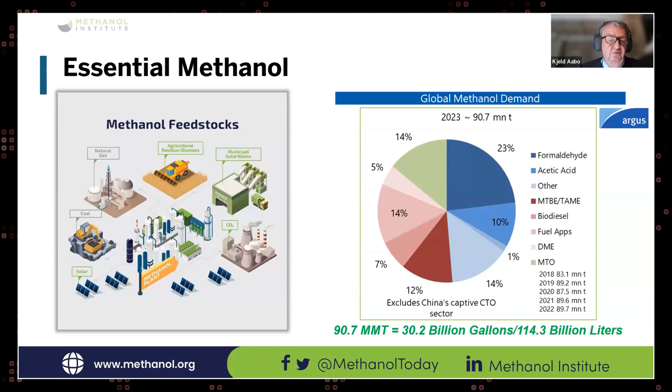Suddenly the interest for the maritime was exploding, you could say, and a lot of members there are from that area, the maritime. Then we have renewables.

I was just two weeks, one month ago at Kasø in Denmark, where an e-methanol plant was introduced. It's a small plant, you could say, but quite big worldwide when we talk about startups and pilot projects - cubic meters, tons per year they are producing. They have gone together with Maersk Mc-Kinney Møller, with Lego, and also with medical industry in Denmark, Novo Nordisk, as they will take off the produced e-methanol, where they are actually collecting the CO2 from the biofuel production. So quite an interesting project coming up now, and they are actually extending it.

So things are really happening. That will also be shown later on in my presentation. Then there are the companies going for renewables, as we talked about here, and we have the technology providers also.

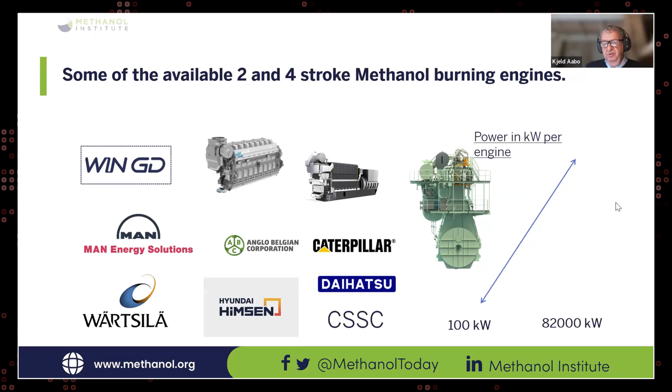If you look into the market and the OEMs, their intention for the design of future engines, you will see that already a lot of OEMs have engines burning methanol in their portfolio. It goes from 100 kilowatt up to 82 megawatt on one engine. So it's both propulsion engines, it's also gensets, and it's all what you use of engines aboard vessels. So there's no challenges there when it comes to the engine and choice of engine for methanol. Also, a lot of running hours have actually already been gone on two-stroke engines from 2016, where the first two-stroke engine was at sea trial.

The year before, actually, Wärtsilä had a four-stroke engine on Stena starting up on sea trial. It was a retrofit project and so on. So the experience on using methanol is, you can say, a long list.

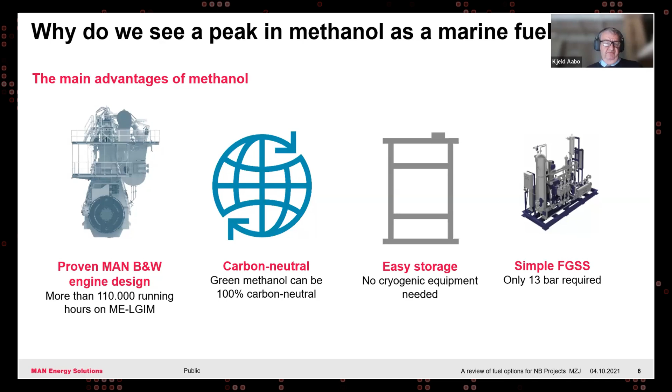It can be carbon neutral. It's easiest to storage - you don't have the cryogenic systems. It's a simple fuel gas supply system. And from my time in MAN, we went through a lot of hazard investigations along with the design and development of the engine itself, just to be totally safe. It is a low flashpoint fuel and has to be treated like it.

We are following closely what is happening on the engine side. This is new vessels and orders with methanol engines, propulsion engines. About 378 vessels have been ordered yet, and it's increasing every month. If you look at the top in the middle here, you will see the engine models - different bore sizes, like 95 centimeter. You have the 50 bore, and you have also coming up some of the a little bit smaller ones.

If we look at the OEMs - it's MAN, it's WinGD, it's Wärtsilä, it's ABC. And if you look at the application and vessel types, you see it's all from container vessels to offshore. It's ferry in between, ro-ro, it's oil product tankers, and so forth. And a long list here on the right side of the companies who have actually ordered such vessels.

This is the ready new vessels and ready book - 753 is registered, and these are vessels that, from the beginning when ordered, have the opportunity to be retrofitted later on. It's exactly the same engine they have from the beginning - there's no prepare of the engine on the engine itself, but they prepare the vessel, like having space enough for fuel gas supply systems and tanks, and also reinforced places on the vessel, so it's not necessary to do that when it's going to be retrofitted. Of course that will take a long time while the engines are in operation, in service. So to reduce that time is important, but also the cost for it is important.

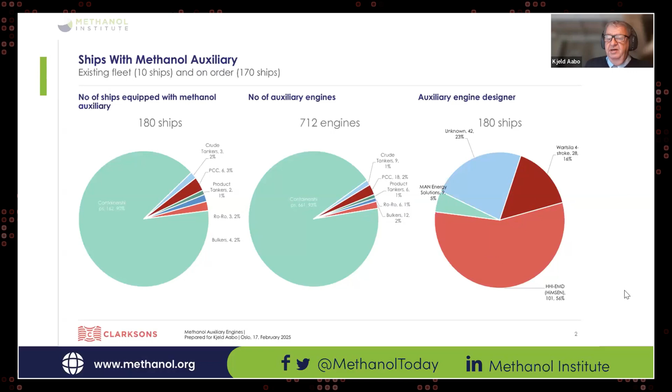But also very interesting is that there are about 50 vessels or more which are ordered - big container vessels from very well known big operators like AP Møller Maersk, CMA CGM, Seaspan, and COSCO - container vessels having huge impact on the CO2 savings, you could say, and quite a number of these vessels.

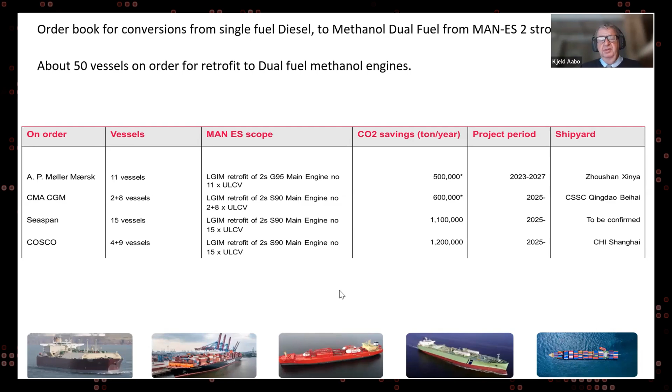We believe that a lot of those engines already in service will be retrofitted in the future. There are a lot of engines still operating, still with a long lifetime, which can be converted. So depending on when green methanol becomes available, there will be much more retrofitting.

We made a small study, back when I was at MAN, just to see what the price difference is between an LNG fueled vessel, a methanol fueled vessel, or a normal single fuel engine running on fuel oil. This was done together with Hyundai Mipo, DNV, us, and the Methanol Institute.

If you consider the price of the vessel being 100, then 110 would be the factor for a methanol fuel engine, about 10% more, and about 22% more for an LNG fuel engine. That will change as you go up in engine size, since the cost becomes relatively smaller, but there will still be a somewhat higher price for the LNG systems.

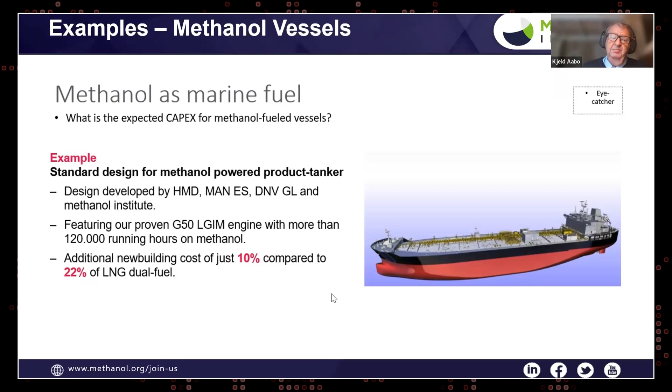One of the areas where we're working very intensively, both with authorities, suppliers and regulators, is the green corridor. We expect that green corridors can accelerate decarbonization, because here you take pilot projects in an isolated situation.

For instance, in Rotterdam and Singapore, where we've been members for more than two years, you see suppliers of methanol, harbor authorities, all going together, sitting in groups to find solutions, looking at safety aspects, bunkering procedures, and how to arrange the supply and bunkering of methanol in the harbor. A lot of things are looked at here, and that sets the standard not only for this green corridor but in the end for the whole world, where methanol is going to be used as one of the fuels.

We are also a member of the Nordic Roadmap, and member of the Silk Alliance, which is run by Lloyd's Register out of Singapore. The status right now is that the vessel is found, and the engine has to be retrofitted for methanol, looking at all the other aspects I mentioned before.

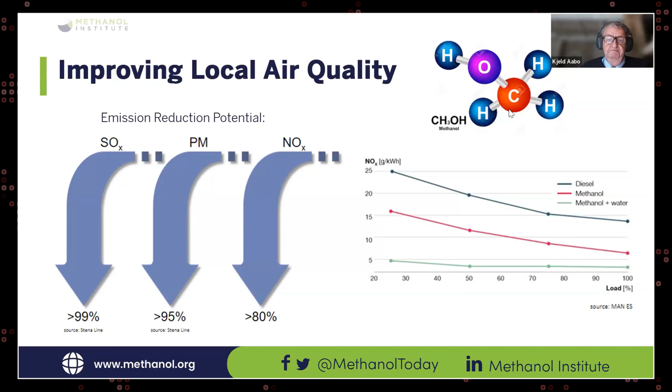We work with different partners on the marine side. We are an NGO, we became that one year ago for IMO, and I have participated with colleagues in MEPC 82 and 83, and of course we're also going to 84.

What we are there for is to look at whether anybody actually knows what methanol is for the marine market, and what's important to look at for the application of methanol. IMO also includes safety, but there's of course also the political part, and here we work with flag states as any other NGO has to do.

Then we have the Clean Maritime Fuel Platform, the European Sustainable Shipping Forum, and the Renewable and Low Carbon Fuel Value Chain Alliance.

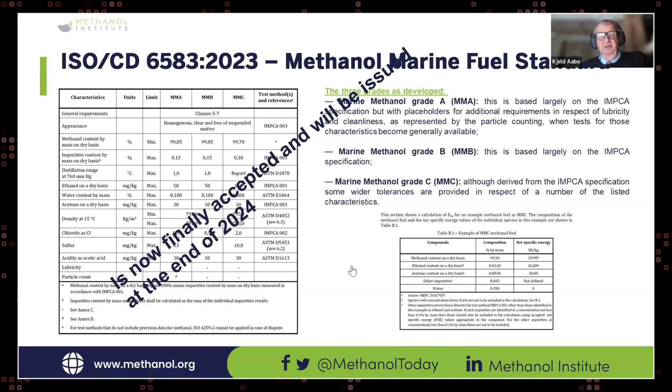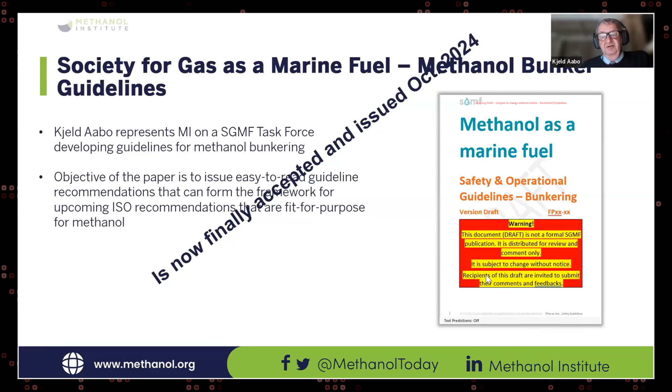We have been part of ISO 6583, which was issued at the end of last year. We have been part of SGMF. We have made a safety and operational guideline for bunkering, which has already been issued. This is because it's an older picture and so on.

We have made a methanol fuel calculator on our website just to get an impression of how much methanol is actually needed. This is a very good tool we use for the green corridors, where they are finding out what is necessary to calculate the needed production supply of green methanol to the harbor.

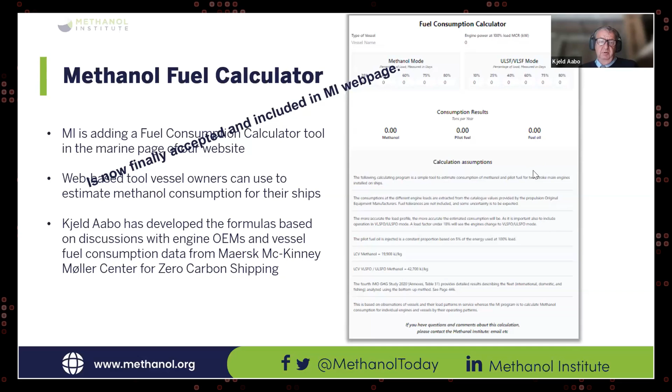We have made different guidelines over time together with different partners. I know you will have the presentation, so you will also see what we can do. There's, for instance, guidelines for truck to ship, shore to ship, ship to ship. And there will be more bunker handling guidelines because this is a continuous process and we learn more and more from the vessels in service.

And of course, that will also be taken into account. Then there's also the education, but I'm sure you will hear from my panel colleagues here more about the education itself.

If you look at the production pipeline for the new fuels, you will see by 2029 North America, China at 46, Europe, and the rest of the world — that's the renewable methanol capacity by region.

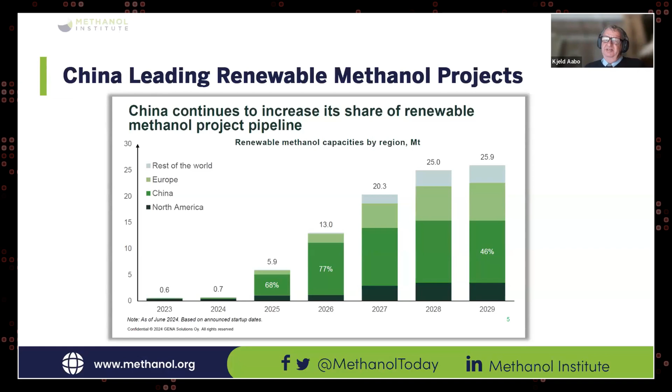So you see China is very much, and actually totally, leading today — I think it's about 66% they are utilizing of the methanol produced today, and about the same is also what they produce themselves. Goldwind and Maersk — Goldwind have made some commitments to Maersk about supply of methanol.

So this is also going the right way, because there's no secret — there isn't really a lot, and definitely not enough, green methanol today. But it is a process. We need to have patience, as I mentioned before. We also need regulation that can push for production, investment in production, logistics, and so on to come through. And it will, of course, go that way as we see it.

In today's availability, there are about 120 harbors where methanol is handled, but that's the methanol already used today by the chemical industry, as I mentioned before. There are about 16 harbors that already have bunkering possibilities for vessels coming in, and there are 22 harbors where they are now investing and installing bunker facilities.

I'm not so much into looking in a crystal ball, because it changes from time to time, and of course this is a prediction. If this is going to be the case in 2050, I really don't know, and I don't believe that will be the case, to be quite honest. A lot of things will change in that. But we hope this is the way it goes, because this is the target for the world and the CO2 limitations and so on.

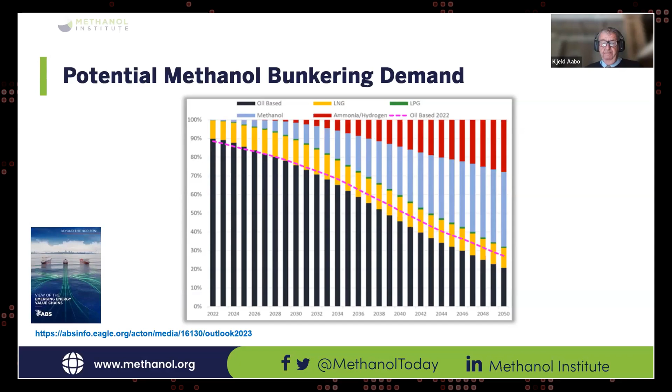There are about 170 different projects today. It is expected that by about 2030 there will be at least 30 million tons of bio-methanol available. Then we have blue methanol, where you are producing, for instance, with LNG or gas and using carbon capture technology — it will be available. It will be possible, you could say, to maybe even go up to 34, 35 million tons, looking at the different projects today. Some of the projects will not mature, and more will come, but this is what we expect so far. And that is the way toward, you can say, the goal of CO2 neutrality using methanol.

Thank you very much. Thank you very much indeed.

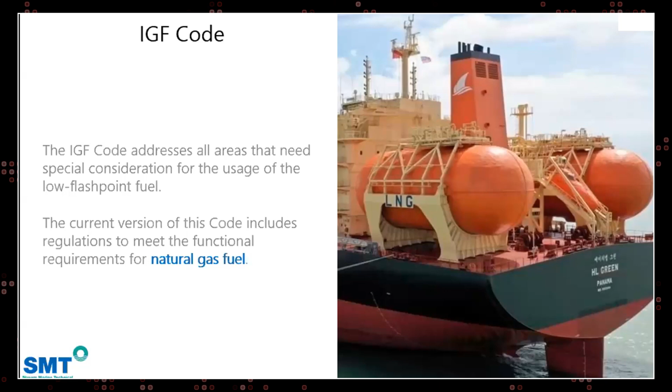And given what we're talking about today, we can see that there are other fuels in use, so we need additional regulations. So the regulations for the other low flash point fuels will be added to the code as and when they are developed by the organization or the IMO. But in the meantime, for other low flash point fuels, compliance with the functional requirements of the code must be demonstrated through something called alternative design.

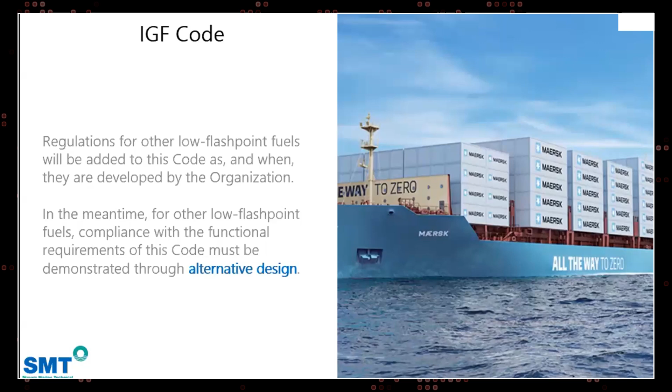Basically, alternative design allows a shipbuilder to deviate from the IGF code, or to design a system for a fuel not specifically addressed within the code. So anything that's not LNG at the moment has to go through this alternative design process.

And the key requirements of alternative design are that the proposed design meets the intent of the goal and the functional requirements concerned. And more importantly, it provides an equivalent level of safety of the relevant chapters. So any ship running on an alternative fuel should be as safe as a traditionally oil-fueled ship, or in the case of methanol or other future fuels, as safe as an LNG ship.

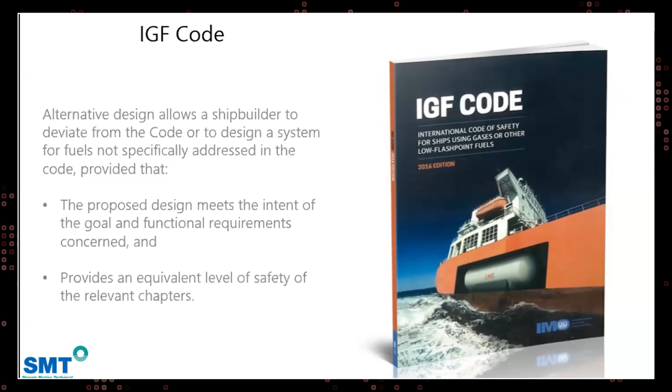And that brings us on then to the interim guidelines for methanol. So this is a specific set of guidelines for methanol as a fuel. And as you can see, these were introduced in December 2020. The guidelines for the safety of ships using methyl and ethyl alcohol, to give it its full name, as a fuel, provide provisions to minimize the risk to the ship, the crew, and the environment, specifically when using methanol as a fuel.

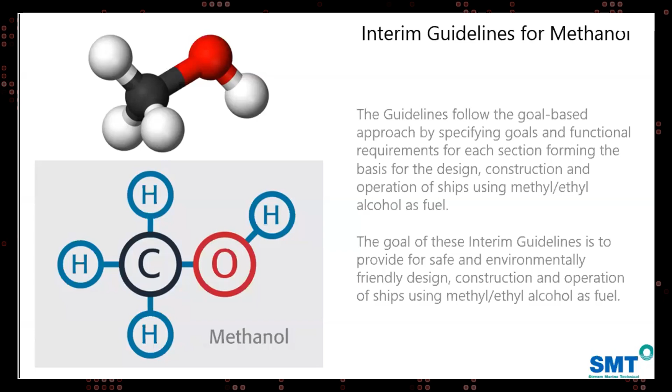So we're focused more so on methanol here, given that we haven't got the full regulations as part of the IGF code. It's again an introduction into the area. So again, the guidelines will mirror somewhat the LNG requirements in the IGF code. They will follow a goal-based approach. They'll specify goals and functional requirements for each section, and that will form the basis for the design, the construction, and the operation of the ships using methanol or methyl ethyl alcohols as fuels.

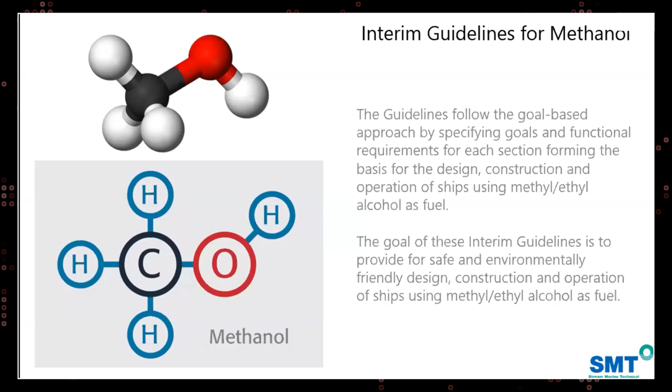And again, our overall goal here with these interim guidelines is to provide for safe and environmentally friendly design, construction, and operation of any ships running on methanol or methyl ethyl alcohols. The areas covered by the interim guidelines, again, they somewhat mirror what's already in the IGF code. You're going to look at areas like ship design and arrangement, and the fuel containment system, as we've briefly talked about already.

Methanol is somewhat unique amongst the alternate fuels in that it is a liquid at ambient pressures and temperatures, and as such, it can be stored in more traditional bunker tanks built into the ship rather than an independent tank. And as we've said, there are going to be requirements given that we are a low flash point fuel in methanol, so there's things like additional cofferdams required around the tank. And as we've already mentioned, methanol takes up more volume, about 2 times, so the tanks are going to be bigger. But it is a major benefit having those tanks built into the hull of the ship.

As already mentioned, methanol bunkering is very similar to traditional fuel bunkering in that it is a liquid, but we have adopted some of the safety precautions used with LNG into the methanol bunkering system as well.

Fire safety, again, is very important in all areas, but when we're dealing with methanol specifically, you have those unique characteristics of methanol as a substance. When it burns with a very weak flame, it's a lot harder to see than a traditional flame. It doesn't produce much smoke, it doesn't produce much heat. So it is quite hard to detect from our traditional fire detection systems. So that has to be addressed accordingly on a methanol ship. Ventilation, explosion prevention, always going to be very important.

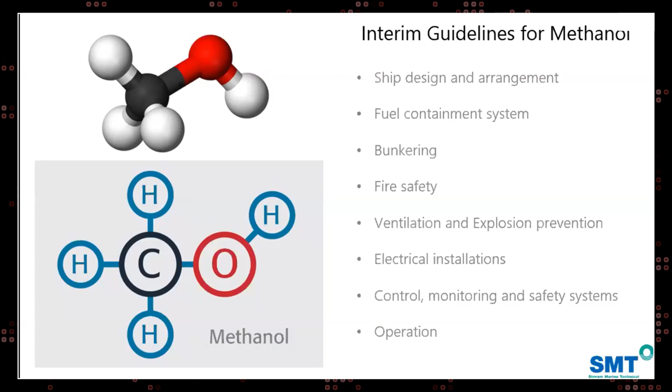And obviously, we have to cover the operation of the vessel as well from the perspective of dealing with a new fuel. That brings us on then to training of personnel, and this is where the IGF code training comes into play. It falls under the purview of STCW, an international convention formed back in 1978, in an attempt to standardize the maritime code by introducing a basic set of rules for seafarers worldwide.

I'm sure everybody is familiar with the STCW code, being a comprehensive set of regulations established by the IMO to ensure that seafarers worldwide are properly trained and certified for their duties at sea. So it sets standards of competence for seafarers internationally.

Specifically within that STCW code, you have Chapter 5, which is special training requirements for personnel on certain types of ship. And there is a wide range of vessels throughout the Merchant Navy fleet. So we do have certain ships which require extra training, and obviously, alternative fuels falls under that banner.

So there is a regulation in Chapter 5 which covers the mandatory minimum requirements for training and qualifications of masters, officers, ratings, and other personnel on ships subject to the IGF code. And we split the training into 2 sections. First off, you have basic IGF.

And that is on the screen there, the key phrase for who requires basic IGF training: any seafarers responsible for designated safety duties associated with the care, use, or emergency response to the fuel on board ship subject to the IGF code shall hold a certificate in basic training. So it can encompass quite a lot of staff on the ship.

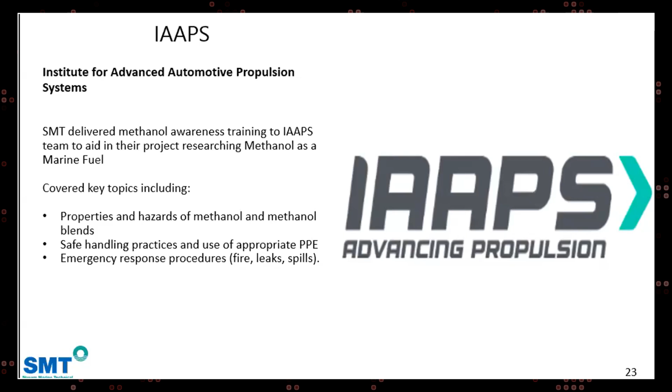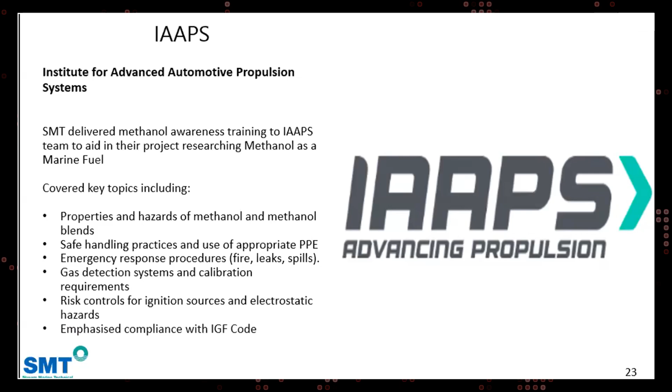Emergency response procedures, taking into consideration fires, leaks and spills. Although vessels already have procedures in place, things are quite different when we look at some of the alternative fuels. Gas detection systems and calibration requirements, both fixed gas detection and personal gas detectors, and risk controls for ignition sources and electrostatic hazards. Lastly with them, they emphasised compliance with the IGF code, as Iain has already mentioned.

Overview of methanol production methods, including the fossil-based, biomethanol from biomass, and e-methanol from green hydrogen and CO2 capture, which has already been mentioned previously. The environmental advantages and regulatory context, going through the IMO greenhouse gas strategy, the transition through the targets for the year 2050, and of course the IGF code as part of the training.

Guidance on safe handling, personal protection equipment again, and gas detection and first aid, same as mentioned before. Key considerations for storage, bunkering and engine integration on methanol fueled vessels.

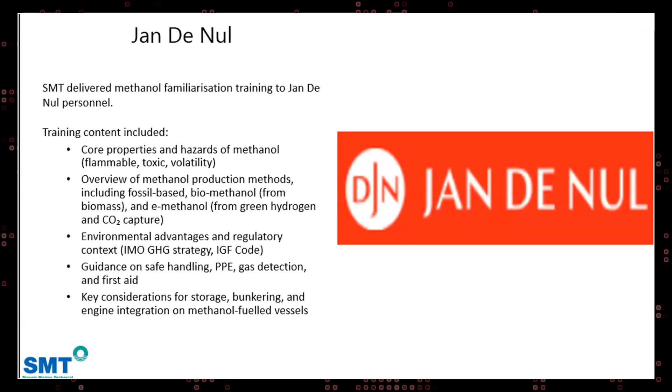Disney also have a plan in the future to build their vessels with a methanol fuel system, and I believe the next series of three could be based on that. Course content pretty much covered exactly what we'd done for IAAPS and also Jan De Nul.

The last project we worked on was with Lloyd's Register, their global client training team. They came to us and asked for help providing a course based on methanol handling and bunkering, so it could enable them to deliver it to their clients. That was for company directors, port organisations, and anyone else who joined their meetings.

The training we provided, again same as the other ones, covered methanol chemical properties, hazards, environmental benefits, health and fire risks, flammability limits, and emergency response. Part of the delivery from Lloyd's Register was for port authorities, and although they have emergency procedures in place, they need to step that up, definitely if they're moving on to alternative fuels like methanol.

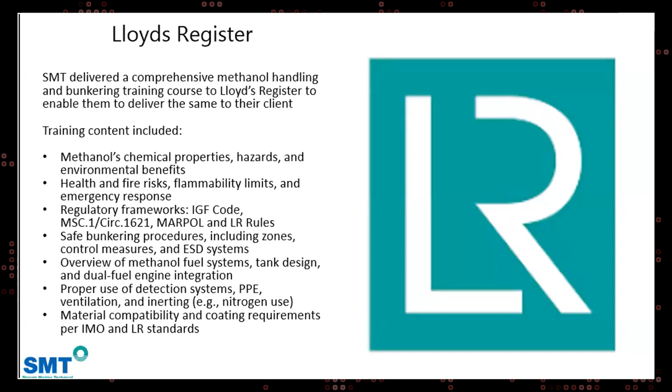For the future, we have been a major contributor within a working group responsible for developing future training frameworks for basic and advanced courses on alternative fuels, inclusive of ammonia, methanol and hydrogen. We were involved in constructing a framework covering what needs to be covered for the basic and advanced courses, going from simpler things through to what we cover on our normal advanced course, but breaking it down further on ammonia, methanol and hydrogen. Here is Stream Marine Technical.

What we could offer: we offer training and consultancy services to support the safe and effective use of alternative marine fuels, including methanol. Of course, we do IGF training, the basic and advanced courses, covering all aspects of the IGF code. We cover basic training either here in Glasgow in our facility, or through online training via webinars. Advanced training, a 5-day course, will be done through here in our facility.

Methanol awareness training provides a clear understanding of methanol properties, safety considerations, and its application as a marine fuel, as we've said, we've done for some companies already. Consultancy-wise, we can help provide guidance for transitional vessels to alternative fuel systems, and of course bespoke training solutions. We can customize courses tailored to meet specific operational and regulatory needs of individual clients.